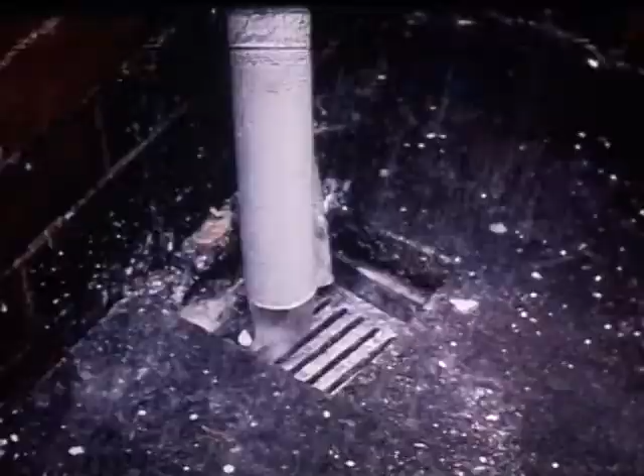But man intervenes in this natural cycle. Where there were fields drinking in the rain, man spreads out buildings and roadways, from which the water must now run off, carrying with it traces of pollution.

To satisfy his needs, water is gathered into reservoirs, or is collected from wells, lakes, and rivers. It is then purified to a high degree, piped to our homes and our factories. Here we treat it lightly, for it seems so cheap and plentiful. It is disposed of so easily when we have finished with it.

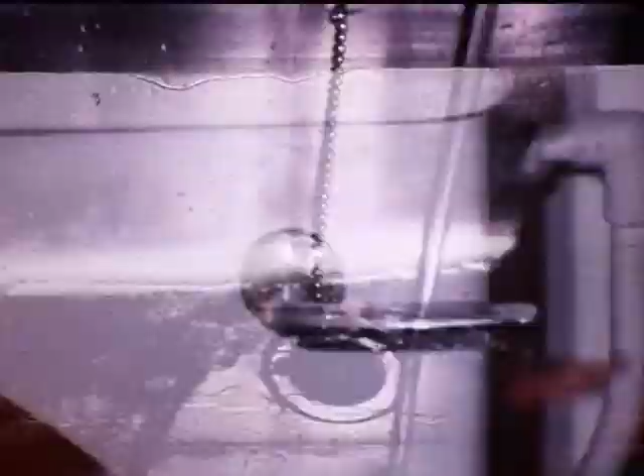We use it in colossal quantities for our industrial processes. As man's standard of living rises, he calls for more and more water, the amount growing at an estimated rate of 3% each year. Although quantities vary from place to place and year to year, every person accounts for about 250 to 300 litres of water per day. The equivalent of a bath of water, carrying dirt, waste matter, grease and chemicals, the waste products of our civilization, domestic and industrial, goes down the drain every day for each man, woman and child.

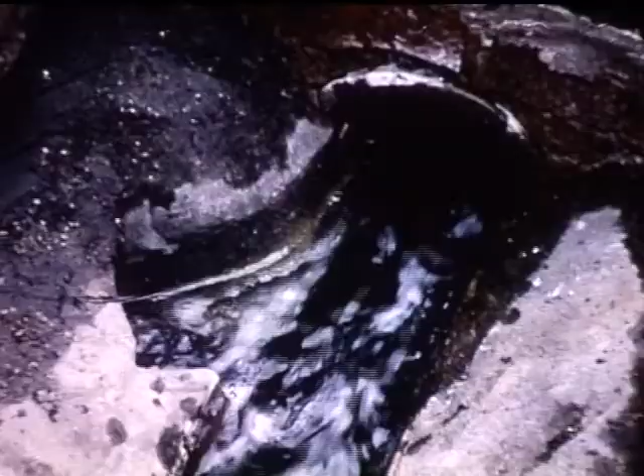It seems so easy to dispose of, but where can it go? Only back into the natural cycle from which it was taken. From the house, the sewage passes through drains and along sewers of larger and larger size buried beneath the city streets. On its way, it is joined by liquid waste from industry.

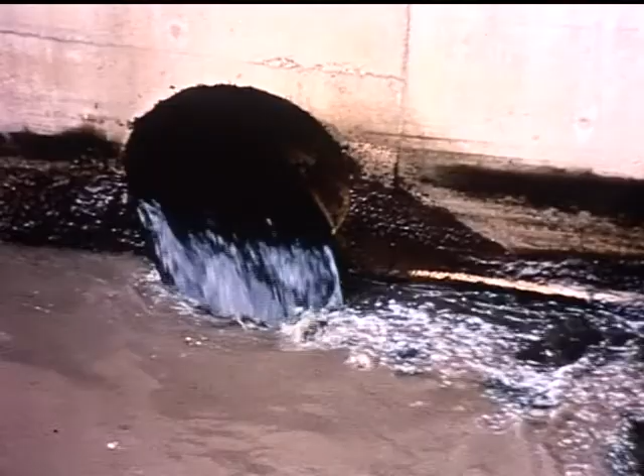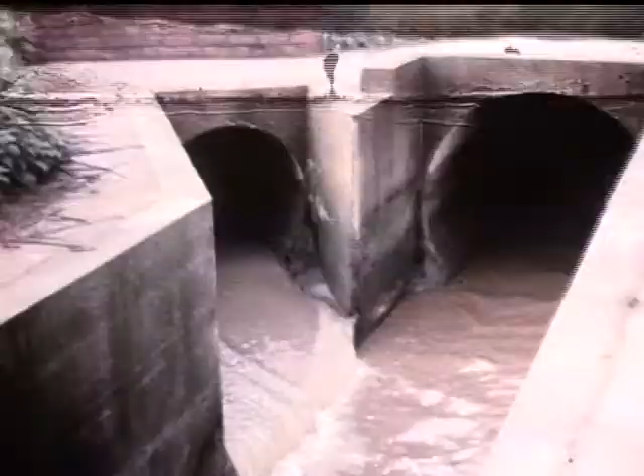All this sewage, together with the polluted rainwater from our roofs and roads, has to be returned to the streams and rivers where it will be diluted and where nature herself will do her best to purify it. The pollution is, however, so great that without help, nature is unable to cope with it. Reserves of oxygen which the river carries become used up, and oxygen needed for the river's own life is also taken. Fish die, the river stagnates.

In times of heavy rain, emergency overflows on the public sewers have to operate, so allowing pollution to enter the river. Unsightly and undesirable as this is, it is at least only occasional. Only with proper water pollution control can the bulk of sewage receive purification, safeguarding our rivers, which will increasingly be required for water supply.

Using nature's own methods, speeded up many times by man's ingenuity, the pollution load on the river can be limited to an amount with which the river can safely deal. Day by day, the large volumes of sewage from our homes and industry are purified in a number of stages.

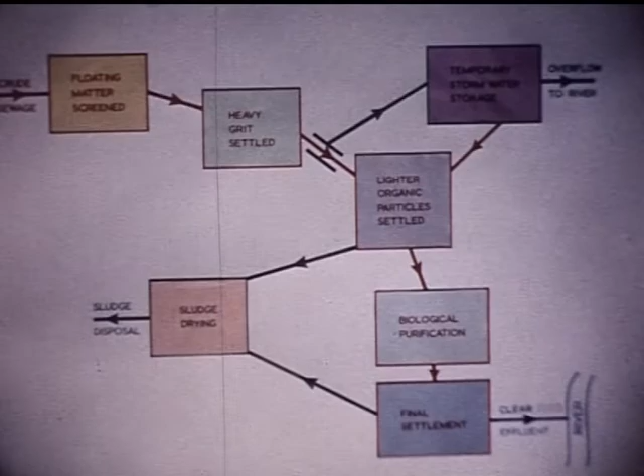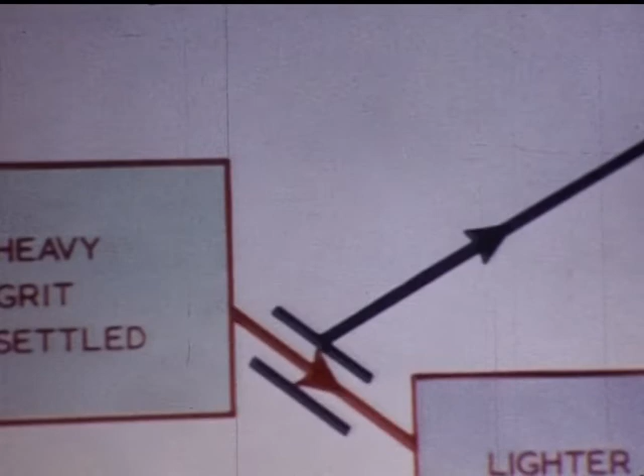First, the floating matter must be screened and shredded to protect machinery. Next, the heavy particles of road grit and sand, which would cause excessive wear in machinery and block pipes and channels, must be removed. And provision must be made for the temporary storage of storm water.

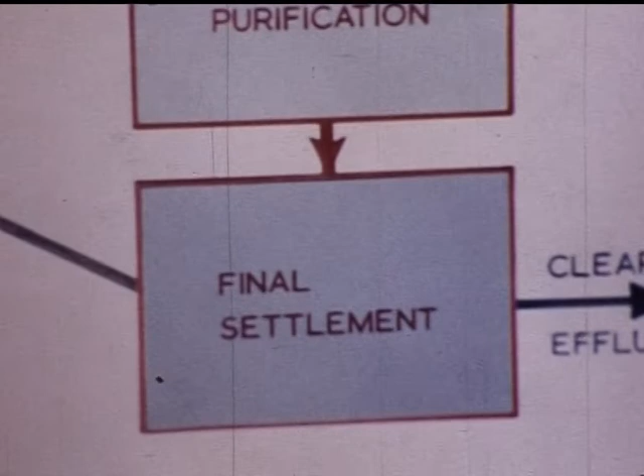Thirdly, most of the lighter organic particles in suspension must be settled out. At the fourth stage, biochemical changes are encouraged to break down the pollution which remains in solution and suspension, and the waste products of this process settled out. The last stage is to dispose of the solid matter from the third and fourth stages.

What changes can be looked for during the treatment? Crude sewage must have its content of suspended solids reduced by at least 90%, and its 5-day biochemical oxygen demand by at least 95% before the final effluent can be safely discharged to the watercourse. These reductions will have been obtained in a much shorter time than nature alone can achieve. Let us follow the treatment through.

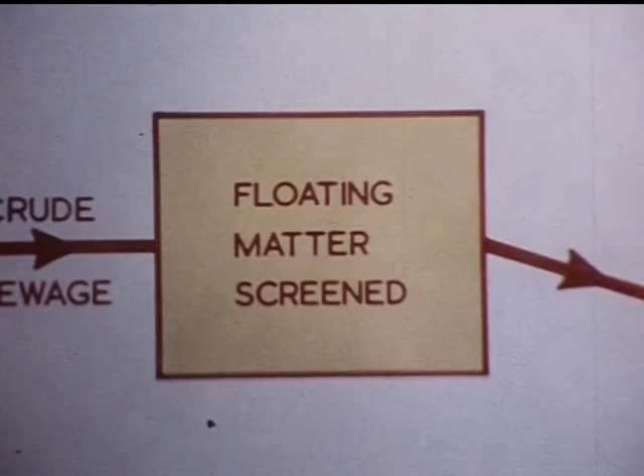Floating matter must first be removed from the flow, for without this precaution, pumps would choke and pipes would block. Therefore, in one method, as the sewage reaches the works inlet, it is led towards the screen house and through the screens, which can be automatically operated and cleaned.

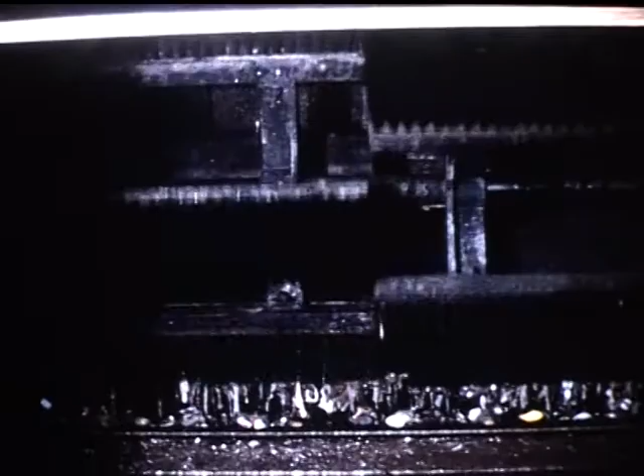The screenings can be passed to a macerating pump, which chops the material to fine pieces before returning it to the flow.

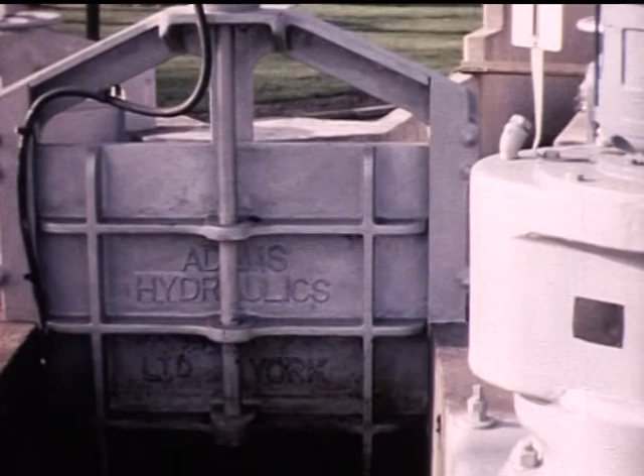These two functions of screen and macerator can be combined into one unit in the comminutor, where, as the drum rotates against fixed blades, the solid particles are shredded between hardened steel cutters until they are small enough to pass through the slots. In order to reduce blade wear, this machine is sometimes used after the process which we look at next.

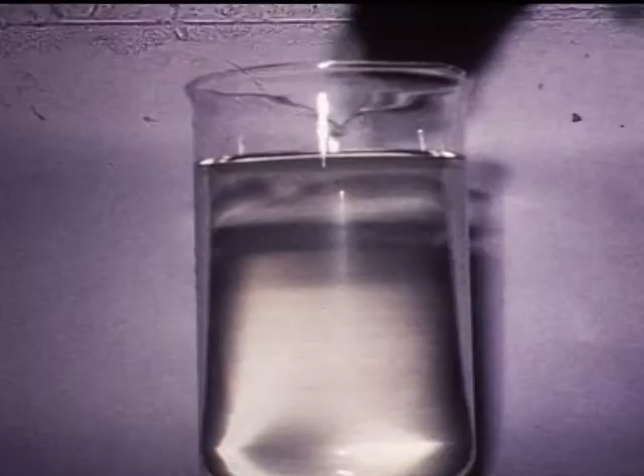The removal of heavy inorganic particles is made easier by the fact that such particles settle very quickly, much more quickly than the lighter organic particles which account for much of the pollution. The problem is, however, complicated by the large variations in rates of flow which can take place.

By adopting channels of approximately parabolic cross-section, the velocity of flow can be kept substantially constant, whatever the depth of flow. In a suitable length of channel, all the grit has time to settle out and is dredged out at intervals.

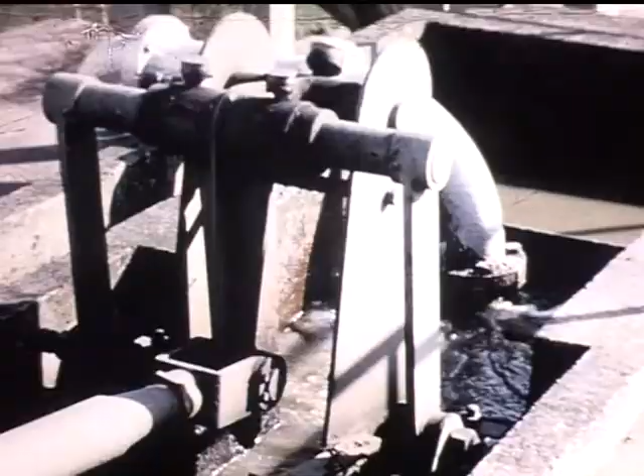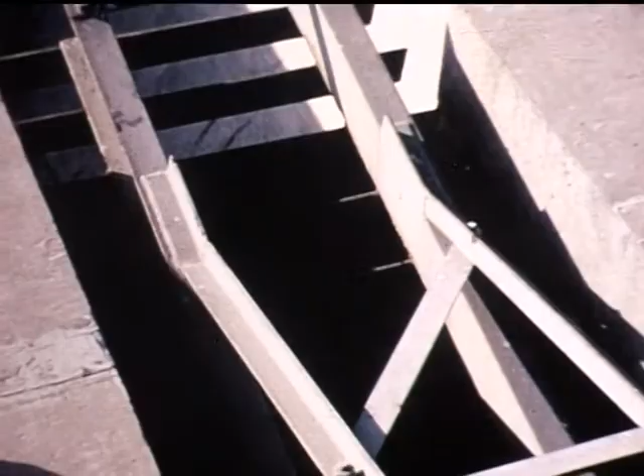In another design, the detritor, the flow is made to pass evenly across a square tank controlled by an outlet weir. The grit, accompanied by some organic matter, settles to the floor and is removed by a rotary scraper to a washing channel. The organic matter is returned to the main flow with the wash water, and the nearly clean grit is discharged.

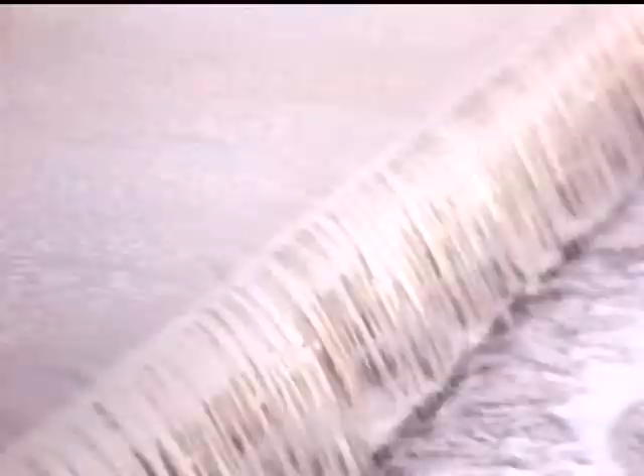So far, all the sewage which reaches the works has been treated. Because in storm time the rate of flow increases to several times the rate in dry weather, it is convenient to pass all rates of flow in excess of 3 times the dry weather flow over a storm overflow weir to storm water storage tanks. After the flow rate has fallen, these tanks are emptied and the content returned for full treatment. If, however, the storm continues, settled sewage is passed to the river.

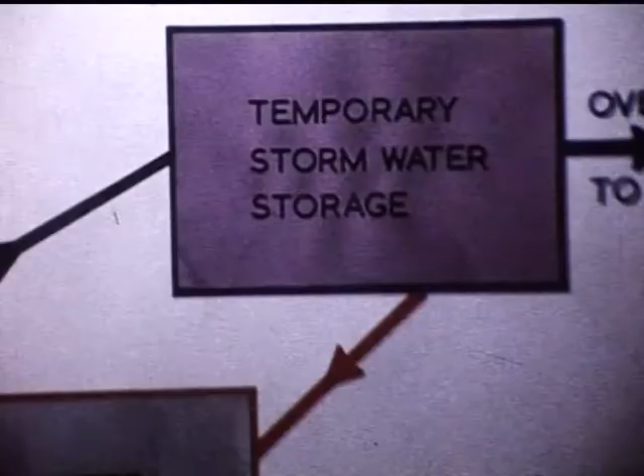The removal of much of the organic suspended matter from sewage could be achieved in an hour or two with static settlement, seen here on laboratory scale in an Imhoff cone.

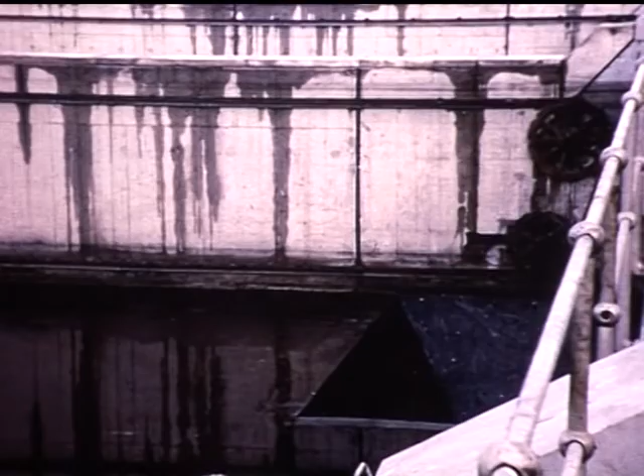When dealing with millions of gallons of sewage per day, this static settlement is impracticable, and the system has to be a continuous one. By passing the sewage gently through large tanks, a process taking a few hours, most of the organic pollution settles out as sludge and is scraped by a slowly moving blade to a hopper from which it is removed at intervals.

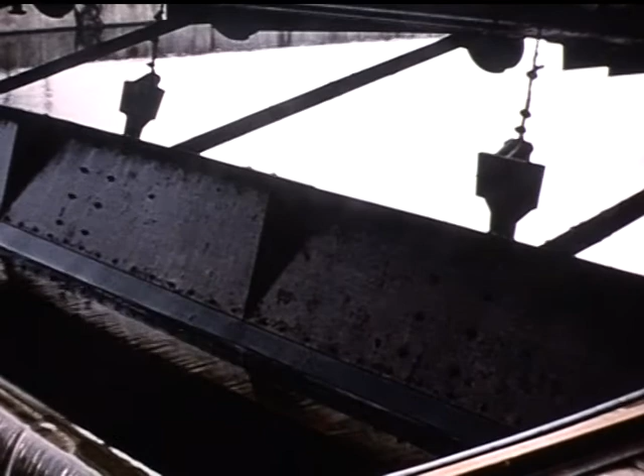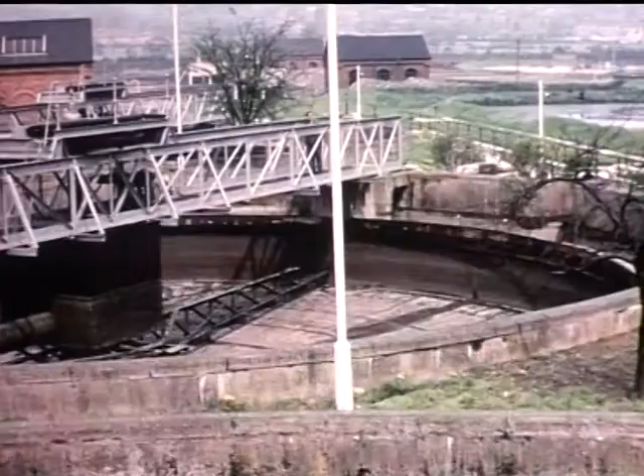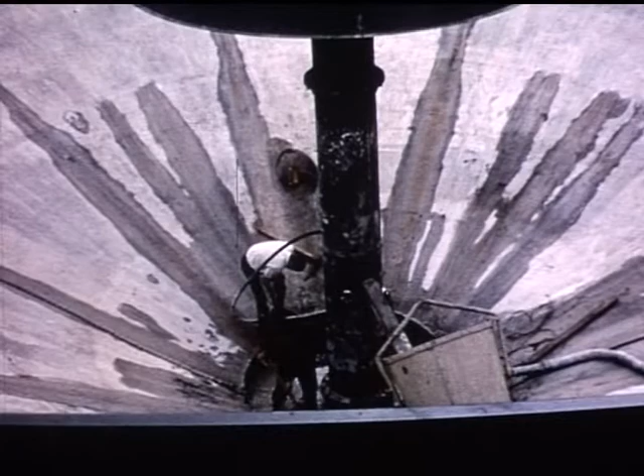Tanks are not only made rectangular in shape, they can be circular with radial flow, or deep tanks with upward flow. All make use of the sedimentation principle, and from them the settled sewage passes over a weir to the next process.

At this stage, the suspended solids content has been reduced considerably, from 350 to 90 milligrams per litre, but the biochemical oxygen demand, BOD, only from, say, 400 to about 270 milligrams per litre. The major reduction in BOD is to be made in the next stage, the biological treatment.

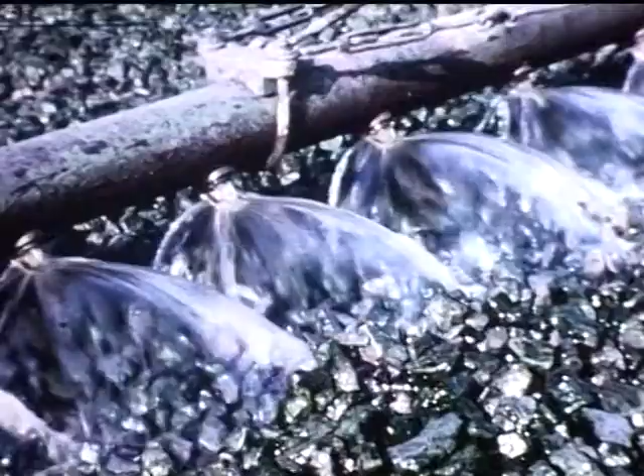One method of biological purification is the bacterial filter. The familiar circular bed is fed through radial arms, through which settled sewage is distributed evenly over the surface. An important factor is good ventilation. Rectangular filters with travelling siphon pipes are used to economize in land area on larger installations.

These are not real filters. The stones provide surface area to which a gelatinous film can cling. In this, aerobic organisms thrive in conditions of good ventilation, mild temperature, and adequate food supply, as the settled sewage trickles past at the most efficient rate.

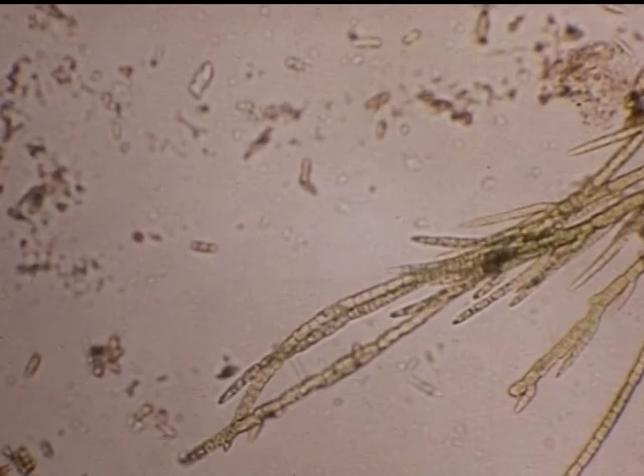A balanced biological system exists. Bacteria break down the complex organic matter, protozoa feed on the bacteria and debris, and algae feed on soluble matter, while scouring organisms such as larvae and worms help to keep the voids open.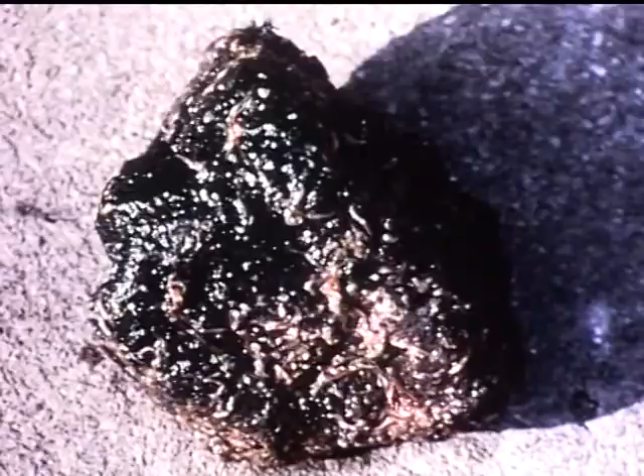The waste products of the bacterial action must be removed in a further sedimentation process before the final effluent can be passed from the works in a stabilized form suitable for discharge to the river. The humus, a brown sludge with a high water content, is drawn off and returned for treatment with the crude sewage.

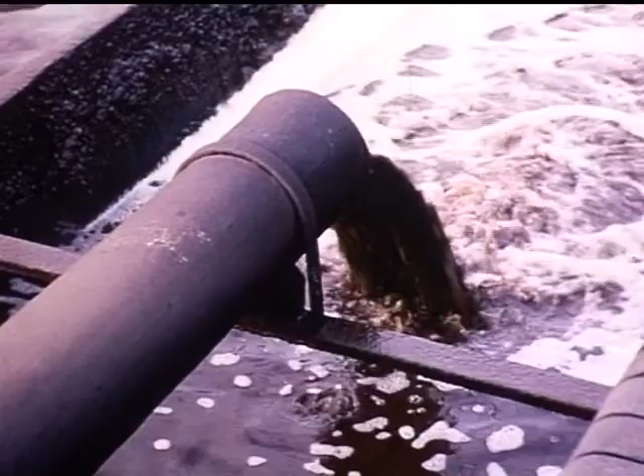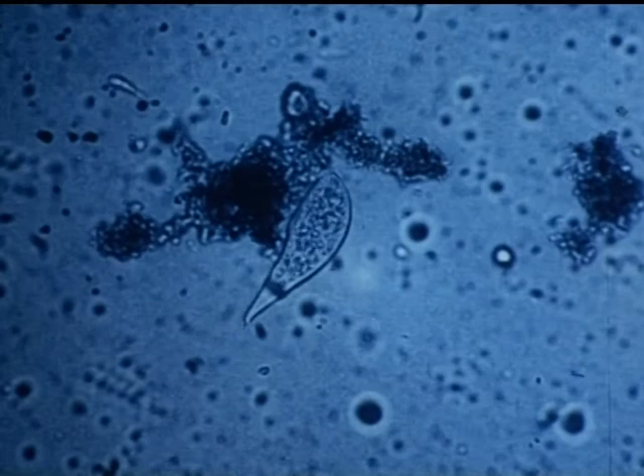Biological treatment can also be carried out in activated sludge processes, in which aerobic organisms are introduced to the tank effluent by returning humus-like sludge from the final settling tanks and providing plenty of air, good mixing, and a longer time of contact. Here again, bacteria and protozoa play active parts.

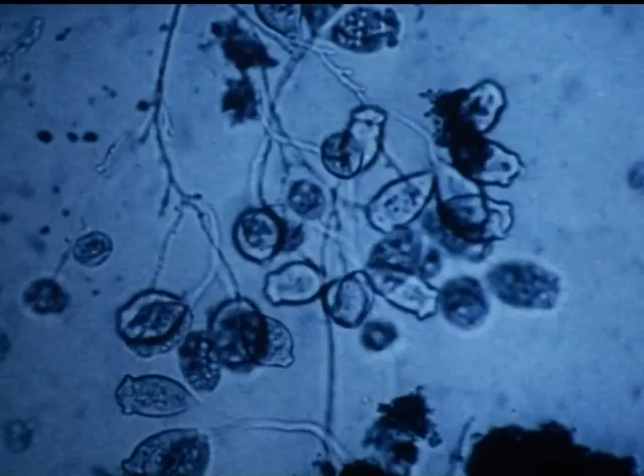In the Sheffield system, air is repeatedly introduced at the surface by paddles, as the mixture of tank effluent and activated sludge flows through miles of channel.

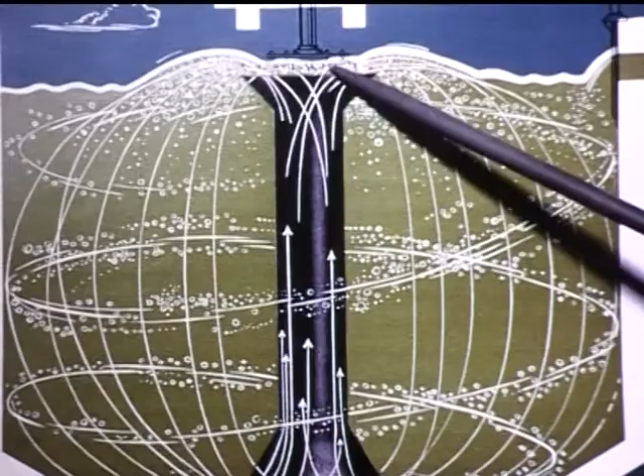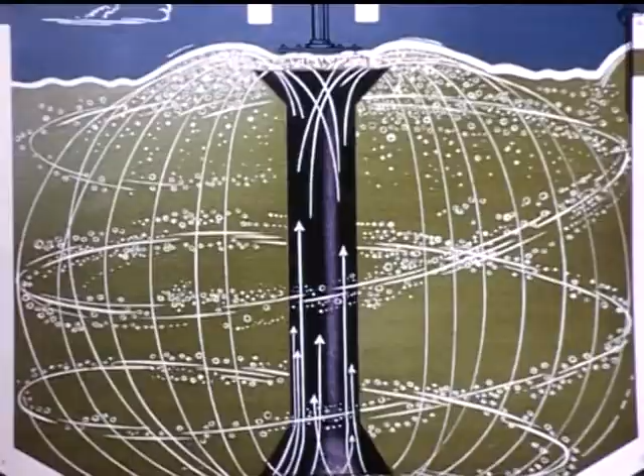The simplex surface aeration process uses deeper tanks, and mixing is effected by a central rotating cone. The mixed liquor of sludge and sewage is drawn up the central uptake tube and discharged over the surface, causing air to be taken into the mixture. Various types and speeds of cones are used to introduce the air and ensure its intimate mixing with the sewage and activated sludge.

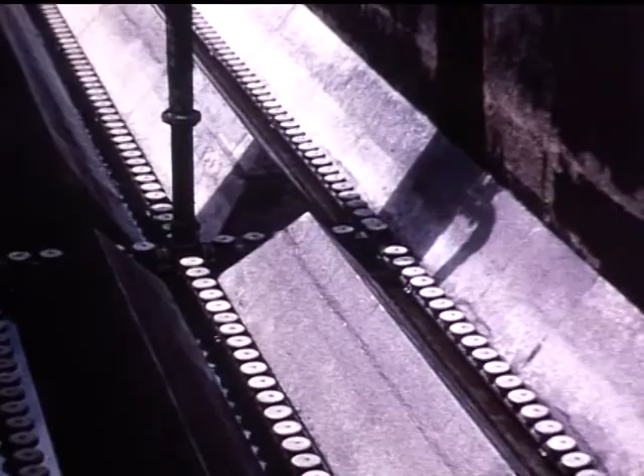The two previous processes introduced air by surface agitation, but in the diffused air activated sludge process, compressed air is introduced at the bottom of the aeration channels through diffuser domes. The domes produce fine bubbles of air, which encourage both absorption of oxygen and the mixing of the sewage and sludge.

In these and other activated sludge processes, final settlement must also follow. The final effluent passes over the weir to the river, while the activated sludge is continuously drawn off from the final tanks and returned for reuse in the process.

This is only one of the many uses for pumping plant in water pollution control. Activated sludge, surplus to requirements, is returned to the works inlet.

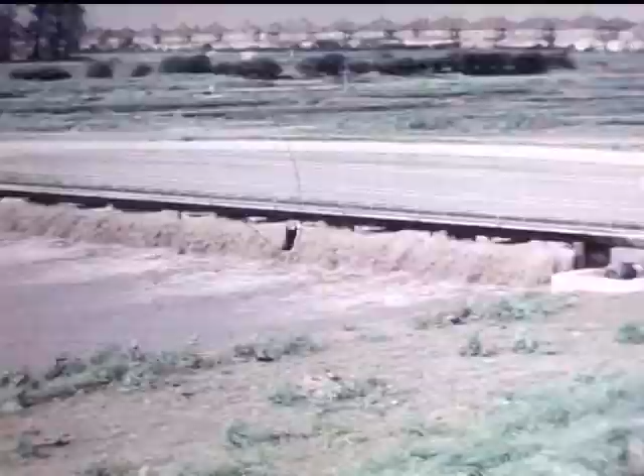Another activated sludge process developed in Holland is the Pasveer oxidation ditch. This is an extended aeration process. The surface aeration is created by a rotating stainless steel brush, the TNO rotor. A mixture of the returned activated sludge and macerated raw sewage is fed to the ditch by way of a V-notched trough to give even distribution.

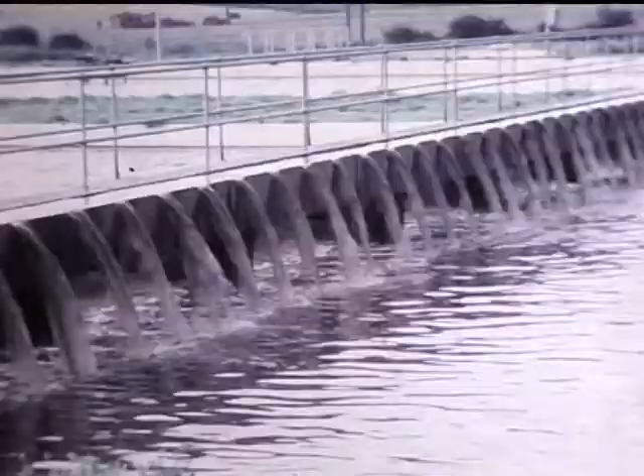The crude sewage has first been partly purified as tank effluent and then, after biological treatment, as final effluent. The suspended solids have been reduced from 350 to 90 and then to 30 milligrams per litre. The biochemical oxygen demand has been reduced from 400 to 270 and then to 20 milligrams per litre.

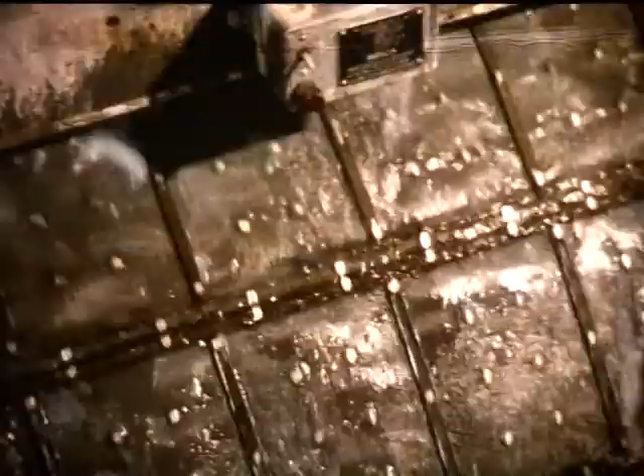Sometimes, however, tertiary treatment is necessary. One method uses the micro strainer. Fine suspended solids are removed by passing the effluent through a fine stainless steel mesh, which reduces the suspended solids to below 10 milligrams per litre. This may be required when the river is to be used for water supply.

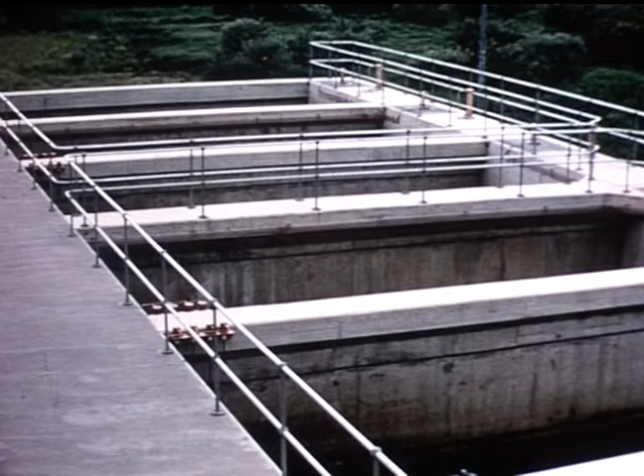Another tertiary process is the rapid gravity sand filter. Effluent is passed through beds of graded sand, which filters out the fine suspended solids. The process can be automated. The sand filter is cleaned by air scouring and backwashing, and the released solids are returned to the sewage flow.

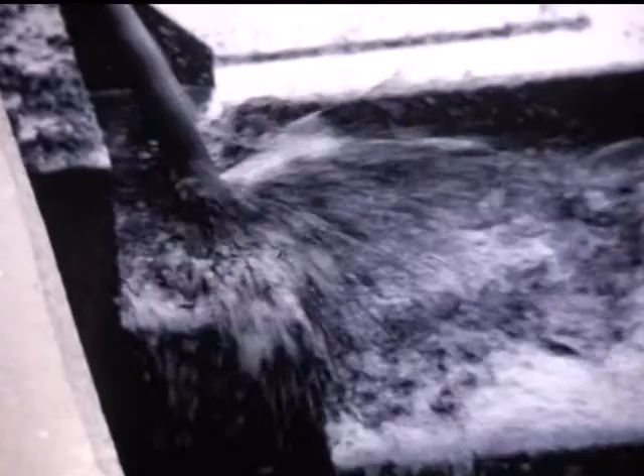All this care ensures the safety of the river, but a colossal task still remains: the disposal of the waste matter removed during the treatment processes, which is mixed with many times its own volume of water. At a few coastal places, the sea provides a dumping ground, but elsewhere, a large part of the problem consists in reducing the moisture content of this sludge so as to greatly reduce its volume for handling.

Where large areas of land are still available, the wet sludge is pumped onto land to dry and to be ploughed in.

At many sewage works, drying beds are constructed, but since most of the drying depends on evaporation, this needs a long time in our damp climate, and a large area of land is again required.

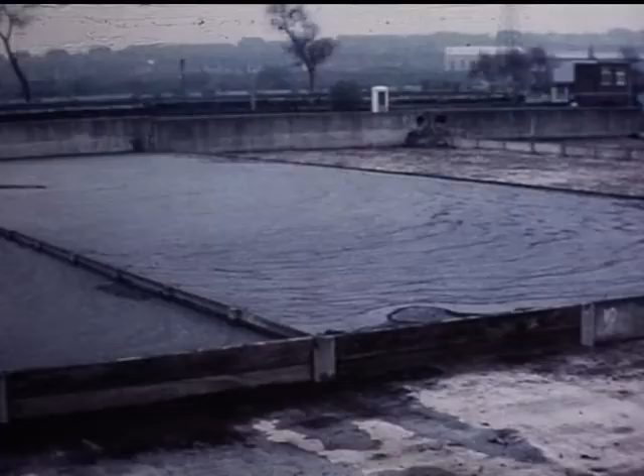The sludge dries down to a thin layer, which is carted away for storage.

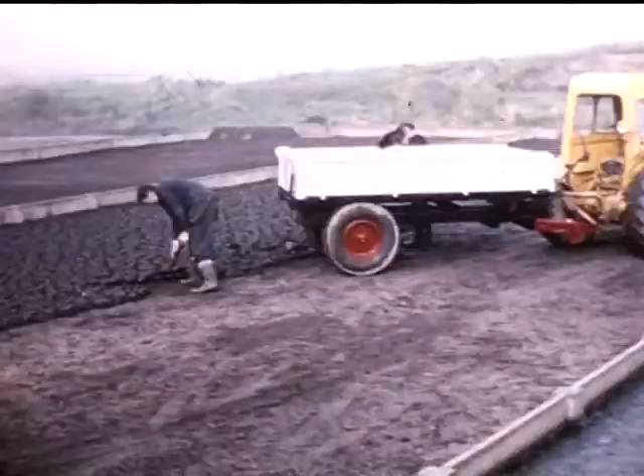The tedious work of lifting a large area of a thin layer of dried sludge can be obviated by the use of a machine designed specially for the purpose.

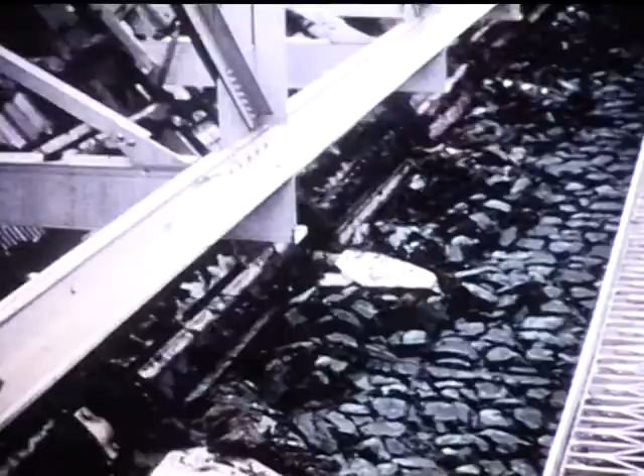Channels cut by the machine in the wet sludge serve to accelerate the drainage of water. When the sludge is dry enough, a whole bed can quickly be lifted, and the sludge conveyed to a tip.

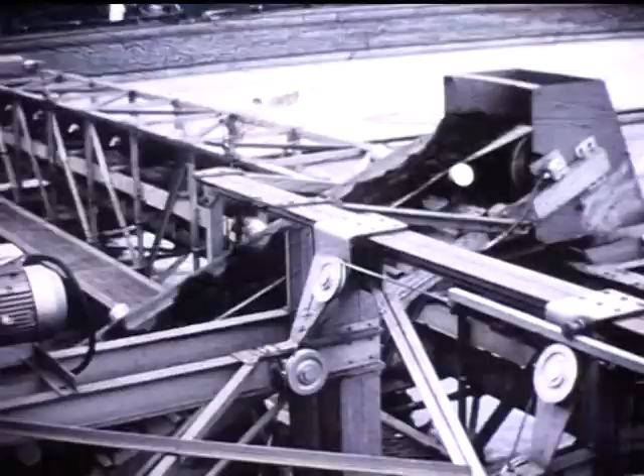The surface of the drying bed is left in a good condition, ready for more wet sludge to be run on.

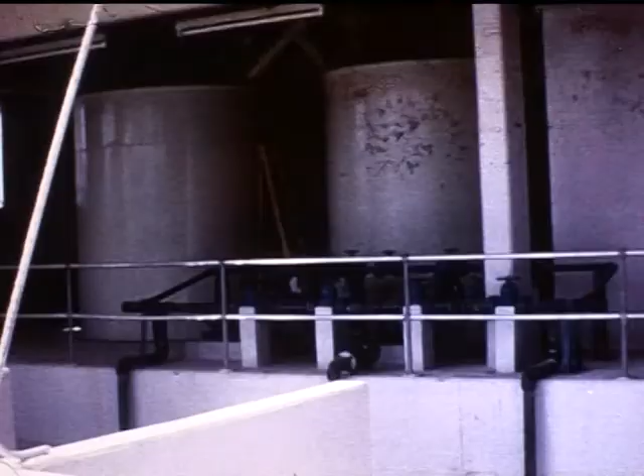The smell of raw sludge is objectionable, and other methods have been devised for urban areas. One process is to de-water the sludge in filter presses. The sludge is mixed with chemicals to ease the separation of water.

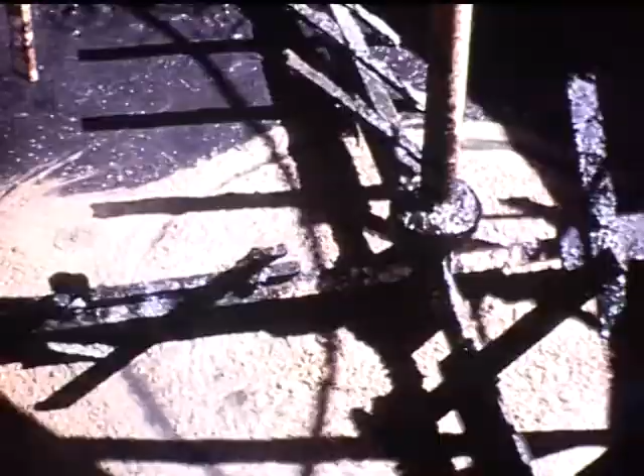One chemical is ferrous sulfate, and another, hydrated lime. These chemicals are mixed with the sludge in a tank using a picket fence mixer. Other chemicals used are aluminium chlorohydrate and various other coagulants.

After the chemical pre-treatment, the sludge is forced at a pressure of about 80 to 100 pounds per square inch, 600 kilonewtons per square meter, into the filter cells, from which water escapes through a filter cloth. During a few hours, a reduction in moisture content from 95% to between 50 to 65% is made by loss of water from the sludge. The actual figure depends on the type of sludge and the method of treatment.

The discharge of filter cake from the press can be automated, and on removal, the sludge cake is dry enough to be carted to the tip.

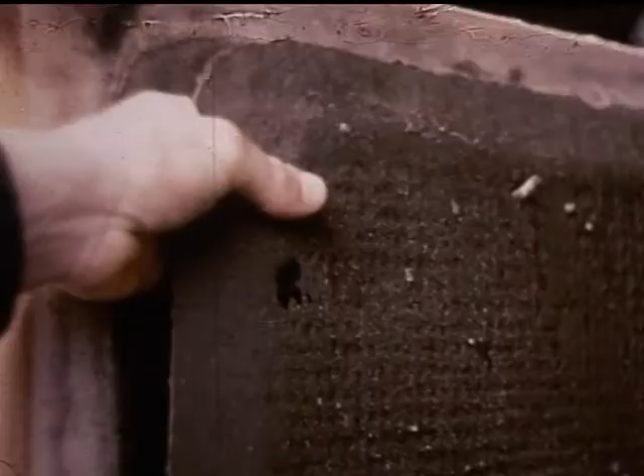In the vacuum filtration process, a layer of treated wet sludge is collected on the outside of a rotating drum from a trough in which sludge is agitated. Reduction of pressure below atmospheric inside the drum encourages movement of the water through a membrane, which in this case is of textile. The thin layer of dried sludge is removed from the drum, assisted by an increase of pressure at the discharge section.

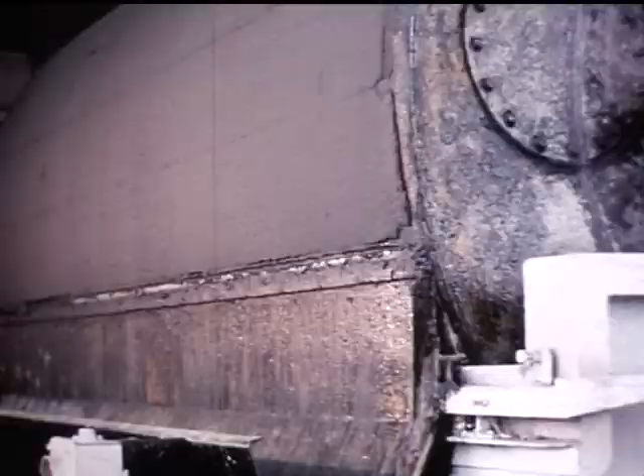An alternative shown here is to use stainless steel coils, for which less maintenance is required, since filter cloths can become blinded with sludge particles. In a few minutes, reductions from 95% to approximately 75% moisture content is achieved.

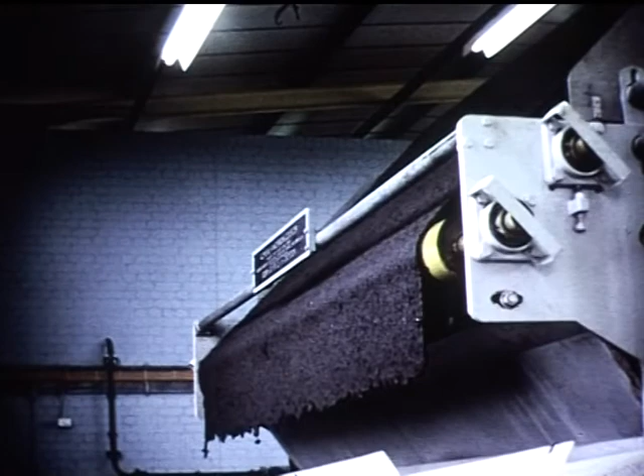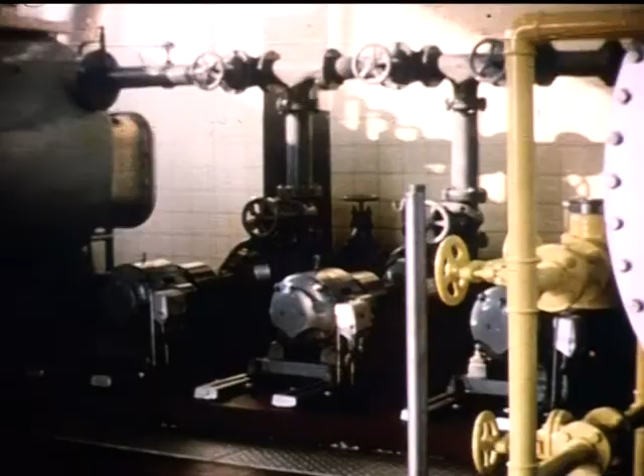In certain cases, use is made of a biological process in treating raw sludge, a process known as digestion. The process is normally carried out at a temperature slightly lower than that of the human body. Because of the large volumes of sludge to be treated, raising the temperature, even to this low figure, requires a considerable amount of heat.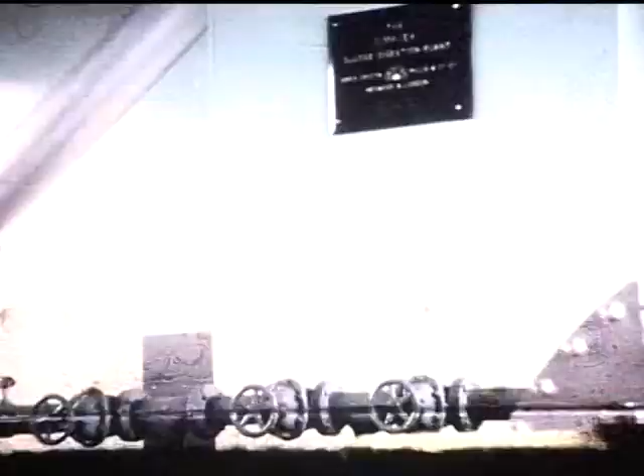The biological changes give rise to the evolution of sludge gas, which is used for heating. The digestion process is first carried out in closed tanks, where conditions encourage the growth of anaerobic bacteria. The floating roof is used to collect the gas, and can also carry a circulating pump which mixes the contents of the tank. Sludge is drawn up the central tube and is discharged over the surface.

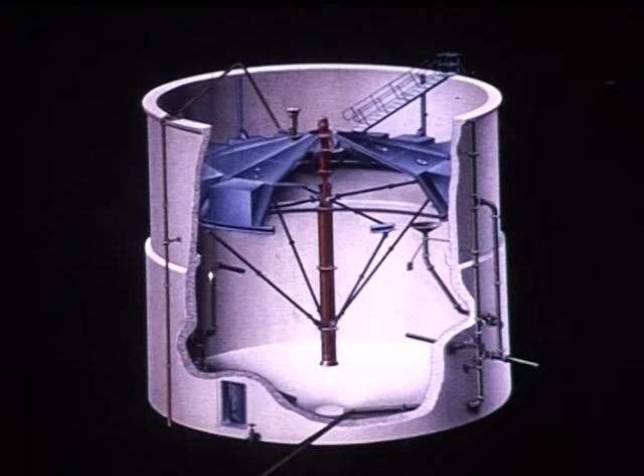This also assists in reducing scum formation. The digested sludge can be drawn off from the bottom of the tank.

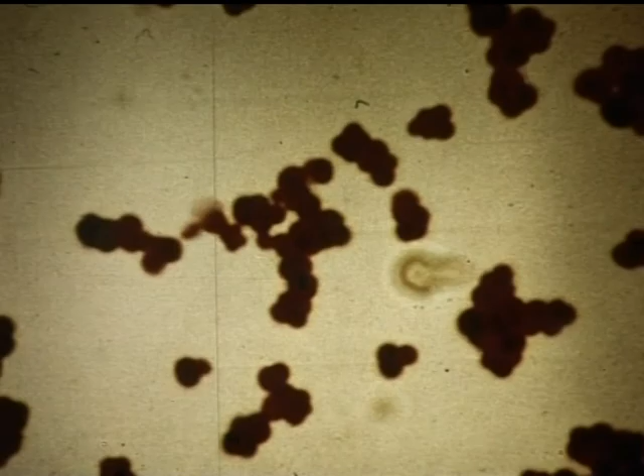Anaerobic bacteria break down fats, proteins, and carbohydrates in the sludge, producing sludge gas which contains about 65% methane and 35% carbon dioxide. The gas is used for heating, or in dual fuel engines for power generation.

The digesting sludge has an average detention time in the primary tanks of 3 to 4 weeks, and is discharged into the secondary digestion tanks for a further period, where separated water is decanted.

Another method for conditioning sludge is the heat treatment process. The sludge is first thickened in a consolidation tank.

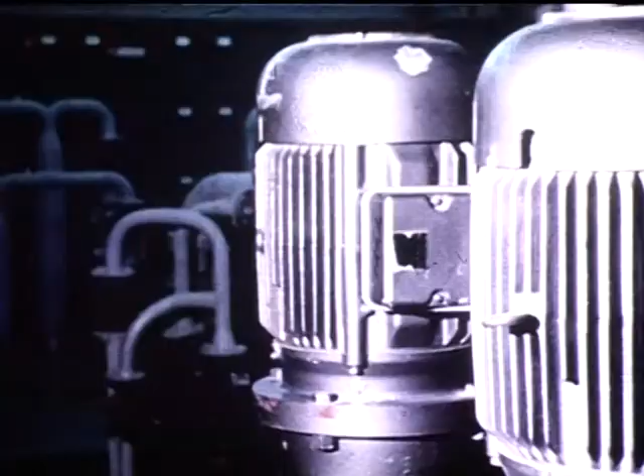It is then passed through macerators and pumped under pressure by ram pumps to a heat exchanger, where it is preheated by the returning processed sludge.

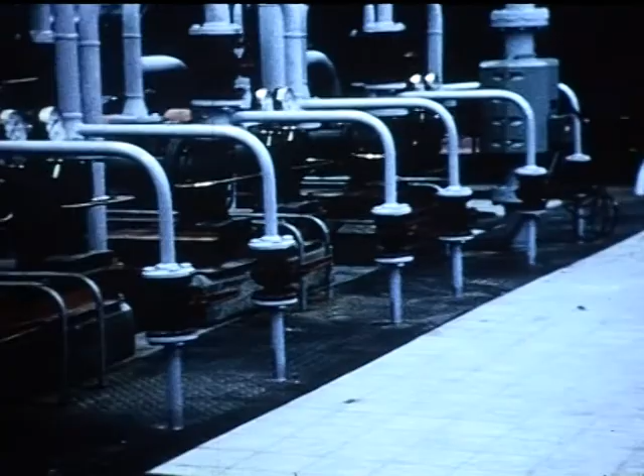Superheated water raises the temperature of the sludge to nearly 200 degrees centigrade in the heat exchanger. The process is fully automatic, and the cooled sludge is passed to decanters before being fed to filter presses.

It is becoming increasingly difficult to find sites where dried raw sludge may be tipped. Due to the nature of industrial wastes, the sludge may not be suitable as a fertilizer in every case, and more drastic measures may have to be taken. The dried sludge is pulverized and conveyed to a furnace for incineration.

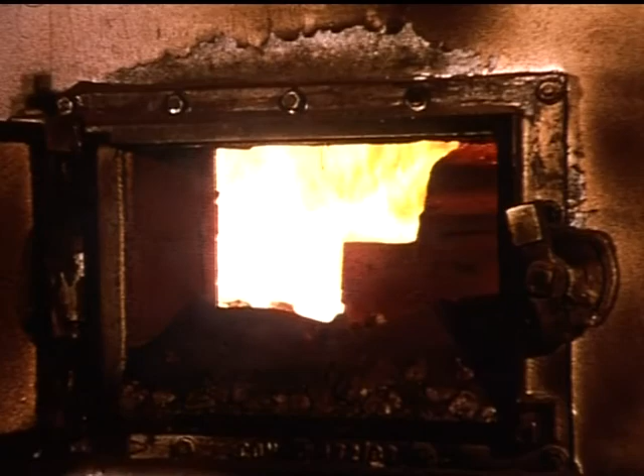In many cases, however, the sewage sludge contains, besides humus, useful quantities of nitrogen and phosphorus, with trace elements which can serve a useful purpose.

When composted with pulverized refuse, which itself contains these valuable materials, an effective soil conditioner can be formed. The waste material from our homes and industries can be turned to valuable use in our farms and gardens. It should never be allowed to spoil the rivers of our land.

Not only can the rivers provide a focus for many of our leisure activities, but as our standard of living rises, our consequent demand for water will increase. We shall rely more and more on clean rivers for the lifeblood of our civilization.